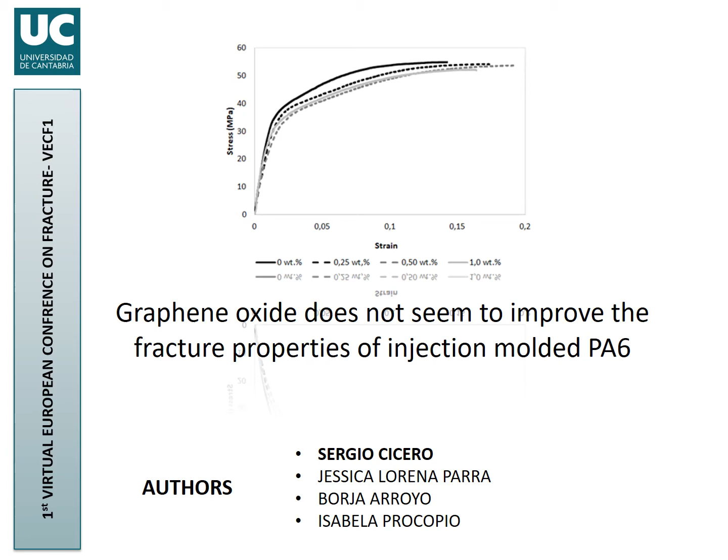If you perform a literature review on the effect of incorporating nanoparticles into different matrices, like polymer matrix composites, ceramic matrix, metal matrix composites, there is a general feeling that when you introduce such nanoparticles, the behavior of the material improves. And here we are talking not only about mechanical properties, we can talk about conductivities, optical properties, thermal properties, etc.

Here, the analysis is focused on mechanical properties only. The rest of properties are not analyzed. And within mechanical properties, we will focus especially on fracture properties and notch effect. When analyzing the effect of nanoparticles on mechanical properties, the analysis is basically focused on tensile, not on fracture. But as I said, the general conclusion in most of the works available in literature is that nanoparticles improve the properties.

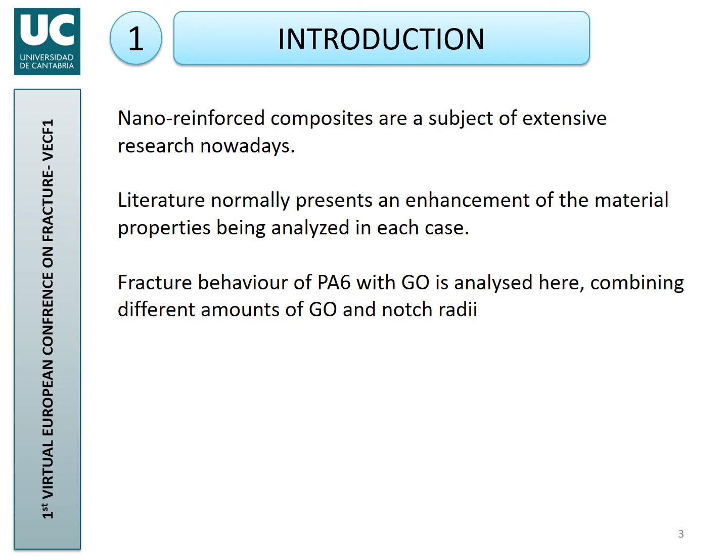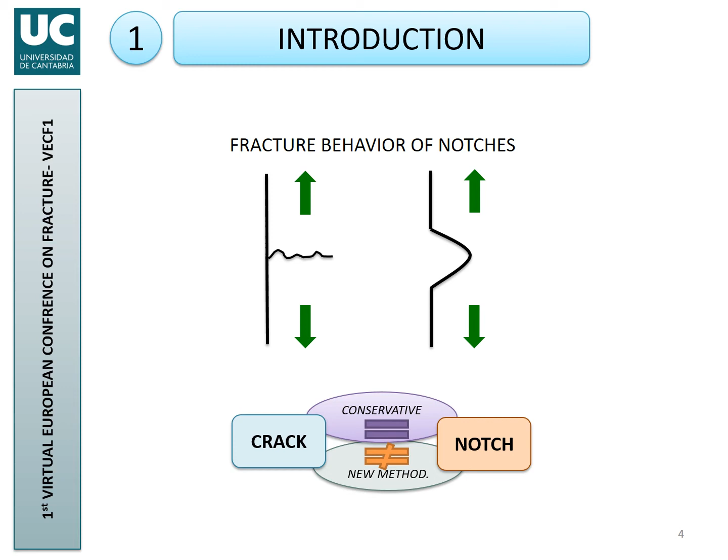And we distinguish between cracked and notched conditions because obviously notches do not behave as cracks, and it is necessary to specifically address the behavior of notches by developing methodologies to analyze this particular type of defects.

So these are the materials that we analyzed. Polyamide 6 with graphene oxide, with graphene oxide contents of 0 weight percentage, 0.25, 0.50, and 1 weight percentage. The pure polyamide, the pure PA6, and the 1% graphene oxide content materials were provided by a producer in pellets.

Obviously, 0 weight percentage material has no nanoparticles, and 1 weight percentage material pellets had the graphene oxide already dispersed in the material, and this dispersion was developed and ensured by the material producer.

To obtain, for example, the 0.50 weight percentage material, you just have to mix 50% of pellets of pure polyamide and 50% amount of 1 weight percentage material, 50-50. If you want a 0.25 weight percentage material, you have to mix 3 parts of pure polyamide and 1 part of 1 weight percentage material.

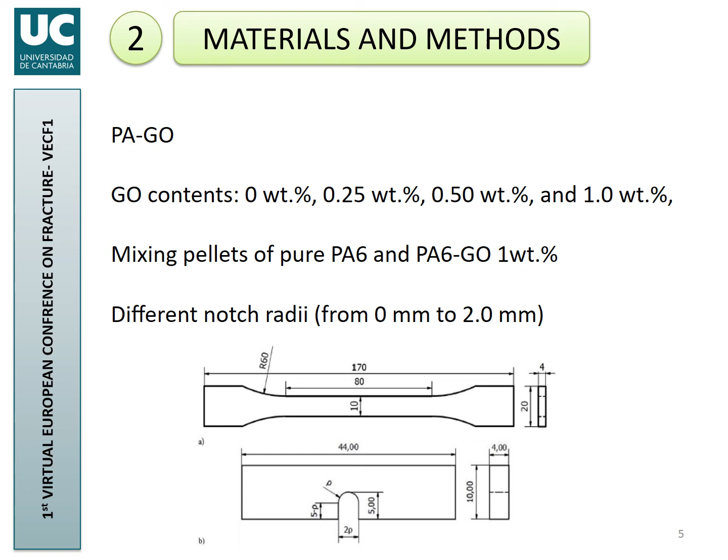So we are mixing different amounts of graphene oxide in the material, and different notch radii, from 0 up to 2 millimeters. And because we are dealing with notches, we are also going to use the theory of critical distances, and particularly the line method, which combined with the Creager-Paris notch tip stress distribution provides us the expression for the apparent fracture toughness shown below, where the apparent fracture toughness is equal to the fracture toughness multiplied by the square root of this factor shown in the slide.

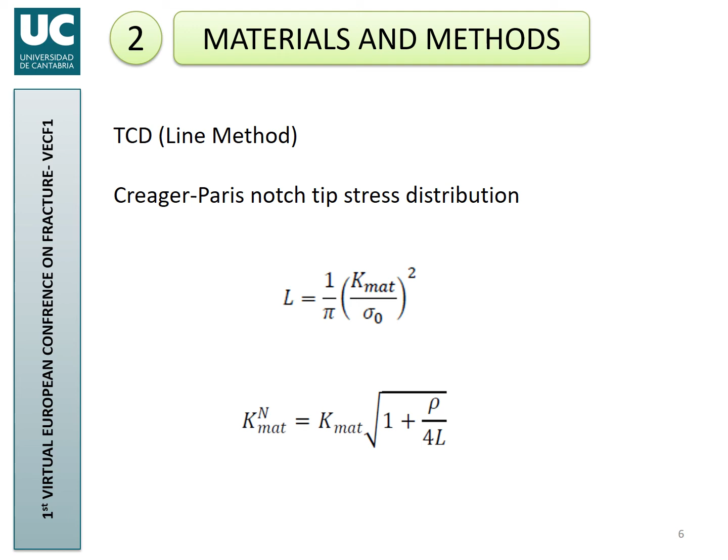So, which are the results that we have obtained? Here you have the tensile tests. You see that the upper curve corresponds to pure polyamide. So it is quite clear that graphene oxide does not improve the strength of the material. When we have introduced nanoparticles on PA6, the Young modulus has become lower generally, and the yield stress and the ultimate tensile strength have been also lowered. On the contrary, the ductility seems to increase a little bit, and fracture toughness is at the end a compromise between the strength and ductility.

At this stage of the research, there were doubts about whether or not the fracture toughness was going to be improved when including nanoparticles.

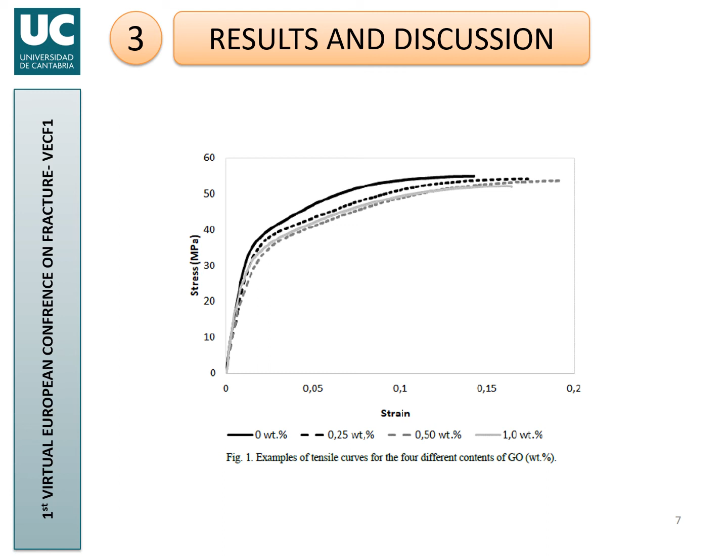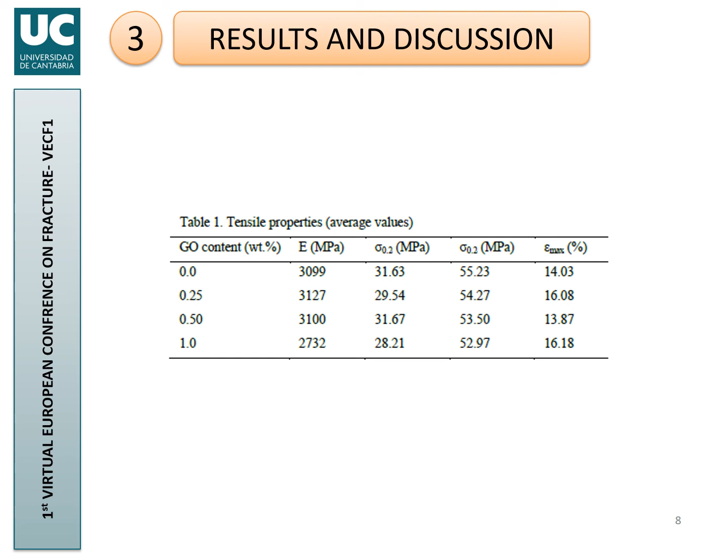Here you have a summary of the results. You see that the yield stress has a tendency to be reduced when including nanoparticles. The Young modulus actually is not very sensitive, except for the case of 1 weight percentage. The ultimate tensile strength, there is a typo there, which is the second column from the right, is rather constant as well, but it tends to be lowered when including nanoparticles, and the ductility has a certain increase when including the nanoparticles.

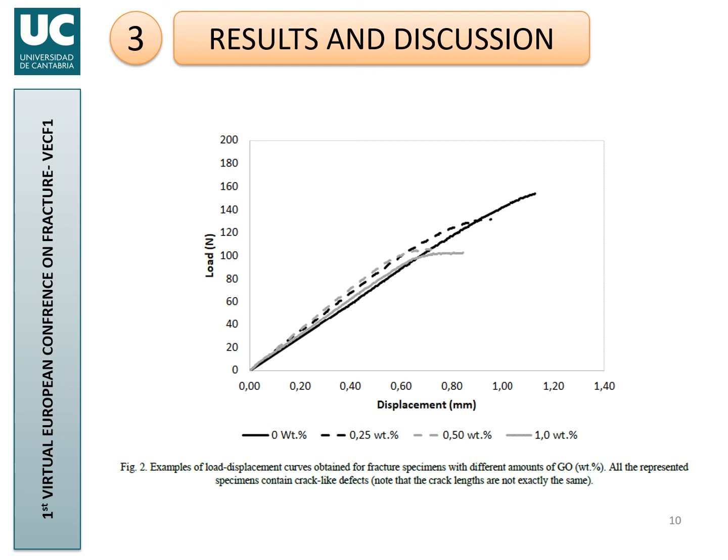Here you have some examples of the load-displacement curves obtained in the fracture tests. You see that the curve for the pure polyamide is much more linear, and this linearity decreases when including the nanoparticles. We represent the apparent fracture toughness. We follow the corresponding fracture standards for composites, and you may see that in the paper.

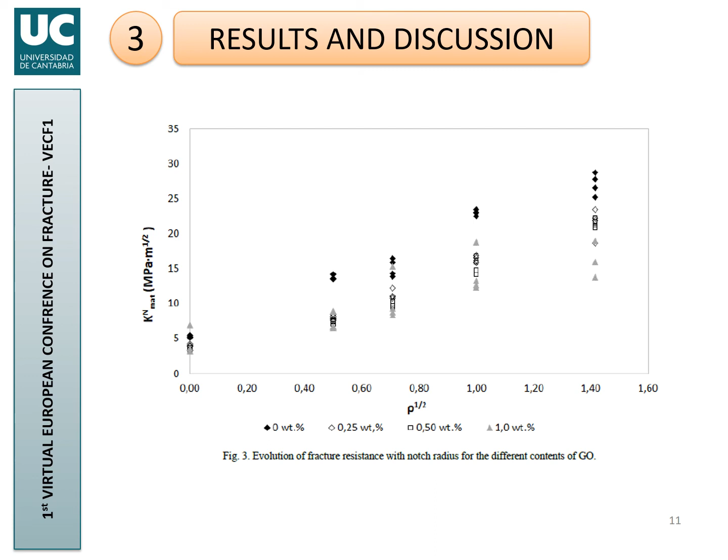The evolution of the apparent fracture toughness is shown in the figure, where it is clear that the higher the graphene oxide content, the lower the result in terms of apparent fracture toughness. We have adjusted these curves by using the line method expression just to have a much clearer picture.

Here you have the results. I mean, the effect of the graphene oxide is clear. The fracture toughness reduces. The notch effect, the increase in the fracture resistance with the notch radius, is quite similar in the different materials. Actually, you have in the paper the critical distance values for the materials, and they are quite similar for the four materials. But it is clear that there is no improvement at all when introducing nanoparticles on PA6, which is surprising if you look at the literature, and it has been quite disappointing for us, to be honest.

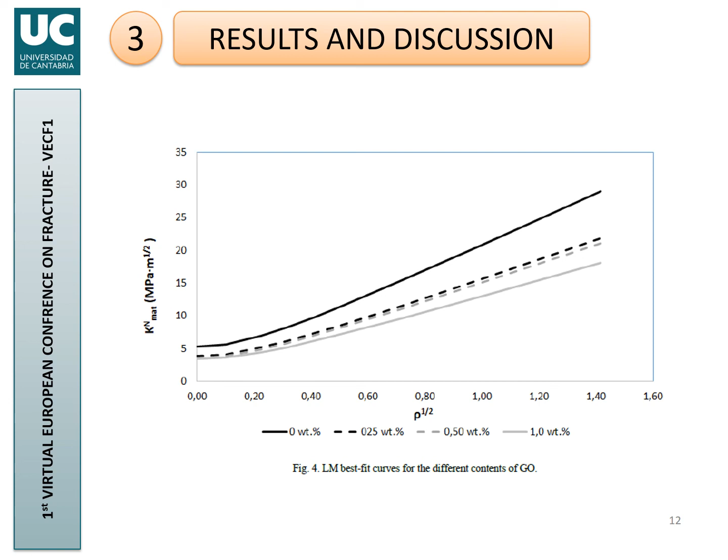But I mean, publishing these results may save quite a lot of effort in terms of time and money to other researchers. We thought it was important to show our results. Of course, these results depend on the type of polyamide and on the type of fabrication process. This is injection molded material. Other types of fabrication processes may lead to different results, but in our case, these are the results.

So, graphene oxide generates a slight reduction in the strength properties of PA6, as well as a slight increase in ductility. Graphene oxide does not improve the fracture resistance. On the contrary, the highest fracture resistance has been observed in pure PA6. Graphene oxide does not significantly affect the notch effect observed in PA6.

The sensitivity of the resulting material to the existence of notches is quite similar in the four materials being analyzed. And these conclusions are restricted to tensile and fracture properties. Other material properties have not been analyzed in this work.